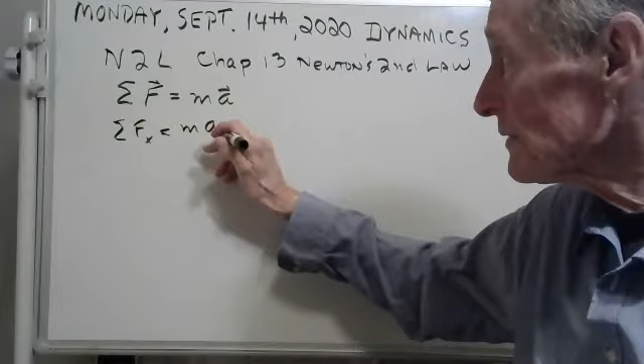Well, let's give you the theory on this. See, this is a vector equation. And so you can write it like this. See, that's the sum of the forces in the x direction. Those are x components. And this is the mass times the x component of your acceleration. Now, if you're dealing with a particle, you don't have to worry about the center of mass, but if you're dealing with a body, then this acceleration is the acceleration of the center of mass.

But see, you can break this in 2 dimensions into x and y. We could even break it into 3 dimensions, but let's learn how to work in 2 dimensions first, and then we can worry about 3 dimensions. In 3 dimensions, you really have to get into 3-dimensional vectors. But remember now, we have not only the xy coordinates, but we have normal tangential coordinates, don't we?

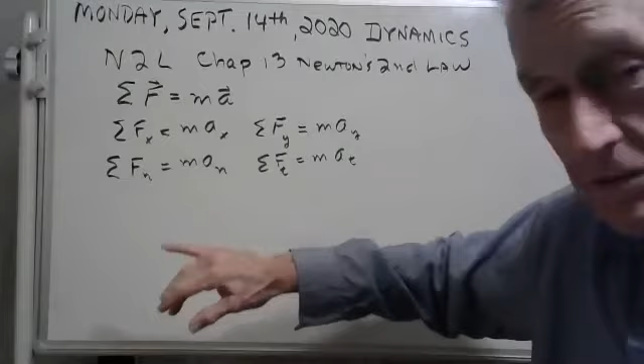See, there's your second law in tangential and normal components. Let me ask one of my wonderful students here. Let's pick on, hey, Jesus. Jesus, you're one of my students. I've had you for a couple of semesters. Jesus, what does that little n mean? There's a little n right there, Jesus. Do you see it? Unmute and tell the others what that little n stands for. Go for it.

Earth calling Jesus. Earth calling Jesus. Come in, Jesus. He must have left his room or whatever.

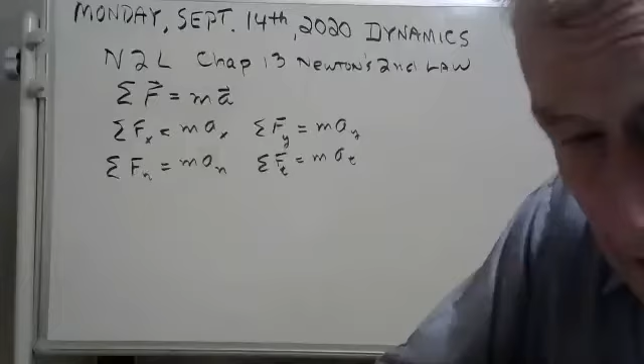Let's try my friend Shane. Shane, unmute and tell the group what that little n means there. Go ahead, Shane. Normal. Yeah, it means normal. Normal what, Shane? Acceleration. Well, yeah, it means normal acceleration. And what does this mean, Shane? This little n here by the F. Normal force. Yeah. What I wanted you to say, I think you understand, but that's the normal component of the force. See, this force, it could be a vector.

Okay, well, there's one more bit of theory here, and then we'll work some problems. And that's this one here. And let me ask Tyler, unmute and tell the other students what this says here, that F with that little r. What is the name of that, Tyler? Tyler, unmute. Tell us what that little r stands for, Tyler.

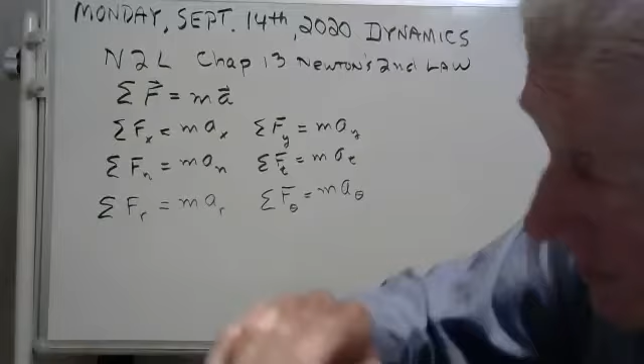Stuart, you're not going to let me down. Stuart, unmute and tell the group what that little r is there. Is it radial? It's the radial what, Stuart? Unit vector? No, it's not the unit vector. There is a radial unit vector, Stuart, and it goes like this. And we'll be using those here in a little while. But that little r stands for what, Stuart? Go ahead, I know you know this. The radial component? Yes, it's the radial component of the force. And that little r stands for the radial component of the acceleration.

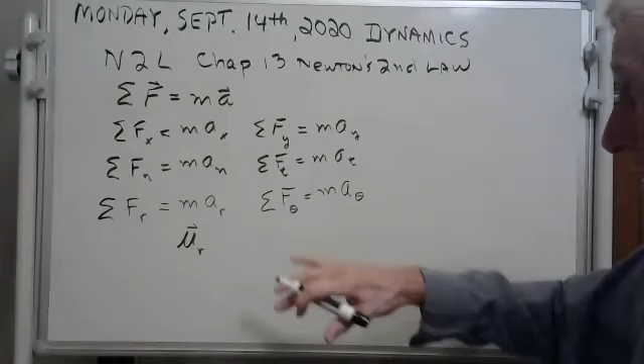Now, this is a tough one, Stuart, but you can do it. What does that little theta stand for right there, Stuart? Oops. Can you see that? The transverse component? Yes, it's the transverse component of the force. And that little guy is the transverse, kind of a fancy name. It's the transverse component of the acceleration. See, the radial transverse coordinate system is what you learned as the polar coordinates. They're just polar coordinates. Now, that right there, I've just really given you the theory in chapter 13 that's important.

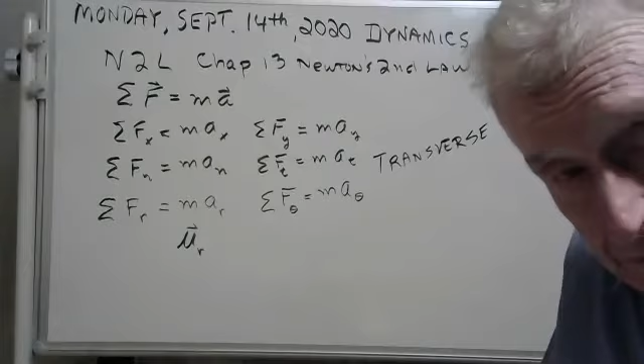That's it. You're looking at it. That's the theory in chapter 13. Now, being able to actually utilize that theory, that's what we have to do. We have to know how to use that. So that's what we're going to do in this chapter. So let's pick a problem and let's start working problems. That's enough theory, but being able to use it. What good is it if you can't use it? It's like any other tool, like a hammer or a screwdriver. There's an art to using a tool. You take a little kid, you give them a hammer, they don't know how to use a hammer. There's an art to it. Okay, well, we're going to try some problems now.

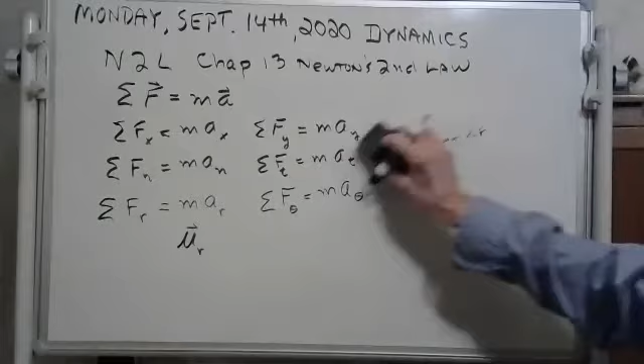Now, this first one is, let me make some room here. But there's our theory. We know what we're going to study. We're going to study Newton's second law. And the problem I want to do is F13.2. It's a fundamental problem. But now I need to find it. Hang on. Let me see if I can find it here. If you can find it, sing out and tell me where it is. I'm looking for it. Okay, I found it. All right.

A motor exerts a force. Let me write this down here. It has a force of 10t squared plus 100. That's in newtons on a cable, t's in seconds. Find the velocity of the 25 kilogram crate when t equals 4 seconds. You've got this crate here, and it's 25 kilogram. And you're connected to a motor.

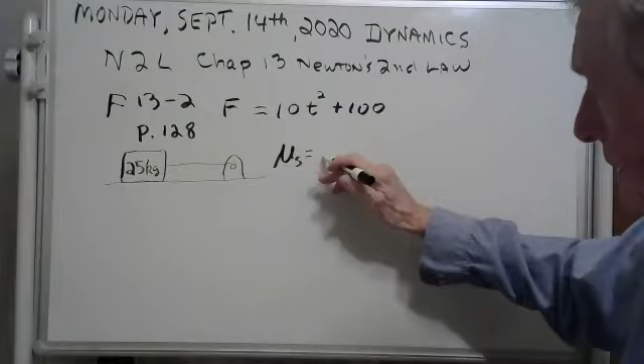Now, is there any friction is the question. Let me read the problem here. We're doing fundamental problem 13.2. It's on page 128. Page 128. Coefficients of static and kinetic friction between the crate are mu sub s. Mu sub s is 0.3. Mu sub k is 0.25.

You'll notice that mu sub s is always bigger. It's harder to break the static friction and get something moving. Once it's moving, the friction is kinetic friction, and the coefficient is smaller. It's easier. Once you get it moving, it's easier to keep it moving. It's harder to start. Once you get it started, it's not so bad. Now they want to know the velocity at 4 seconds. Okay.

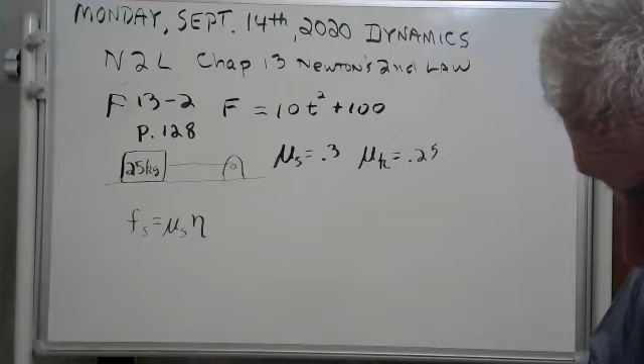Well, now you know the formulas for these things. For instance, the static friction goes like this. I like a little f for my static friction. It goes like this. It's equal to the coefficient, which is 0.3 times the normal. Well, we have to get that normal. You know, the weight is 25 times 9.81. 25, 9.81.

Okay, now the weight, take a little room here. The weight here of this is 245.25, and that's going to equal the normal. They should equal, in this case, 245.25 newtons. And so you can get the frictional force. Well, let me put that in there. Here we go.

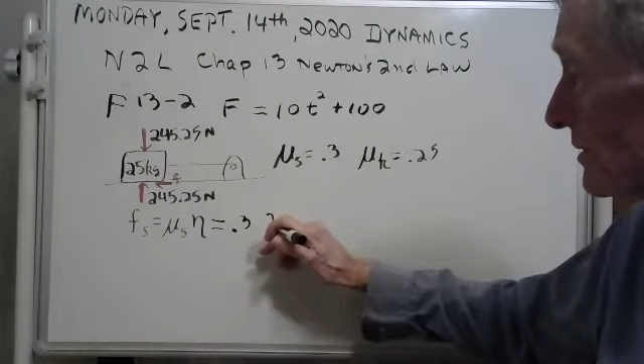The thing is, though, this frictional force, I don't know whether it's going to be static or kinetic. So let me think about that. But if you put that in there and you go 0.3 times that, 0.3 times 245.25, my calculator says 73.575 newtons.

Okay, well, see, when time is 0, when you start the clock, the force is 100 newtons. You know what? That's bigger than 73 newtons, so it's going to take off from the moment you start the clock, because you've overcome the static friction. And once you've overcome the static friction, then the friction is the kinetic friction. You've got to understand something. This really is a less than or equal to equation.

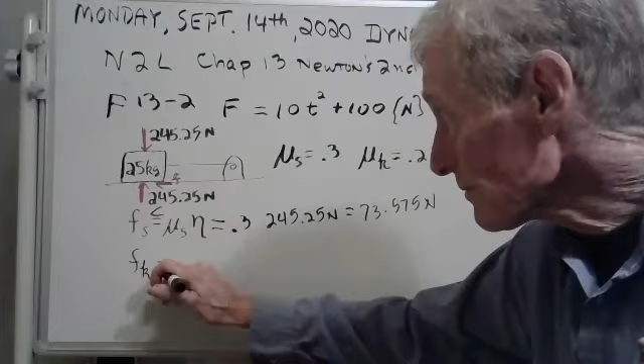When you start at time 0, the force is 100. And that's bigger than 73. So you're into kinetic friction the minute you begin. So we better do the kinetic friction. Here we go. Now the kinetic friction is 0.25 times the normal. So instead of 0.3, it's 0.25. 0.25 times 245.25. I'm getting 61.3125. We have just figured out what the friction is. It's kinetic friction, and it's 61.3125. Okay.

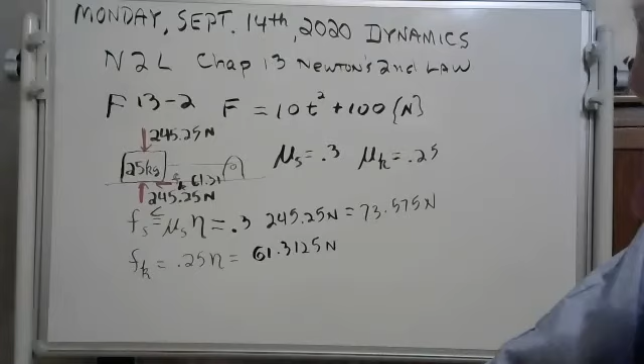So let's use Newton's second law now. And I need some room here. How about up here? I don't need this anymore. The version we want is the sum of the forces in the x direction equals the mass times the acceleration in the x direction. Okay. Well, we got the force. You can put a little x there if you want. Say x is going over here to the right. There's our x. We just need to divide by 25 kilograms. So let me write that.

We have the force. It's 10 t squared plus 100 is equal to 25 kilograms times acceleration in the x. We don't really need the x. This is a one-dimensional problem. Okay. Now that's equal to the mass, which is 25, times acceleration. So we can get an equation for the acceleration now. I'll make some room here. We don't need those. Just divide by 25 and you can get the acceleration.

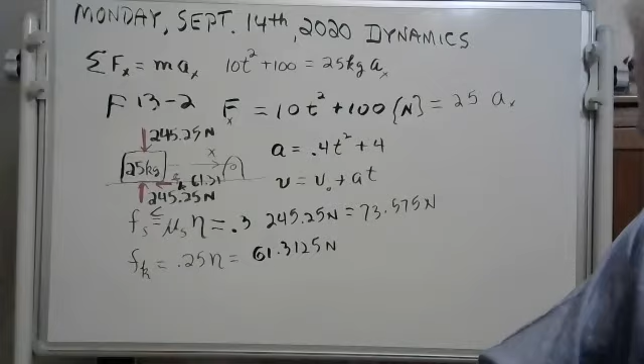Well, we have an equation that goes like this. Do you guys remember those 4 constant acceleration equations? The trouble is we can't use it. This equation only works if the acceleration's a constant. But that doesn't look constant to me. Time isn't a constant. We're all getting older. So you can't use that equation. I tell you what you could use. You could use this equation here.

That one would be okay. That equation's always good. See that equation there? It's always good. You can put a little happy face over it if you want to. There you go. Well, let's use it. Need some room to use it. There's room here. This will work. A dt equals dv. So here's your A.

dt equals dv. Now can you get to here by plugging in that A, multiplying by the dt? I skipped a step because I'm running out of room here. Maybe I shouldn't skip a step. Let's do it down here.

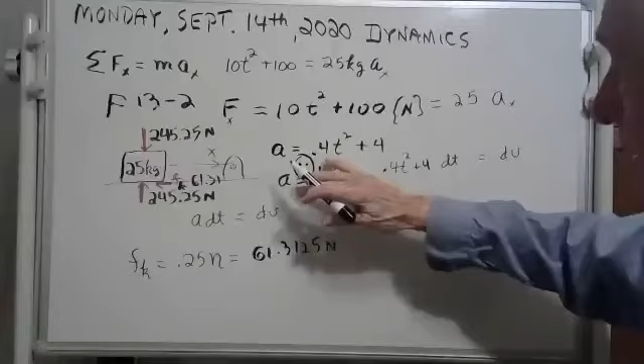See, this A equals dv/dt. You know what that is? That's a, what's the word? Definition. That's a definition. But see, you can write it like this: A dt is equal to dv. Can you get from here to here? All I did was I plugged in my A. See, we figured out A is 0.4t² plus 4. I plugged it in. 0.4t² plus 4, dt, equals dv.

Now, if you can get to here, and if you can see my writing, I think you can. Well, we can make it. Here's what we're going to do. We're going to integrate both sides. And we're going to go from 0 to 4, because that's what they wanted, and from 0 to v, because it started at rest. If you read the problem, I think it starts at rest. Yeah, it says so.

For those of you that just tuned in, we're doing fundamental problem 13.2. It happens to be on page 128, and we're almost done. All we got to do is integrate this. So if you integrate that, you'll get 0.4t³ over 3, right? Plus 4t. Now you have to plug in these numbers from 0 to 4, but we can do that.

And then you'll get v. Now I'm going to plug in the 4 and see what I get. Here we go. 0.4 times 4 cubed. That's 64, isn't it? I think it is. 64 divided by 3, plus 4 times 4 is 16. I know that for sure. Subtract 0 when you plug in the zeros. And I'm getting 24.53, a bunch of threes, equals

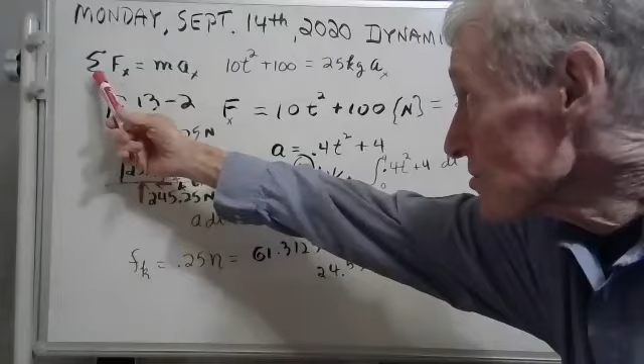Newton's second law says you take the sum of the forces, not just one of them. And I only took one of them. See, that's only the motor acting on it. I left out the friction. So shame on me. So get rid of all this stuff here. I goofed up. Sometimes I think you guys learn more when I make a mistake than when I just go through and do everything right.

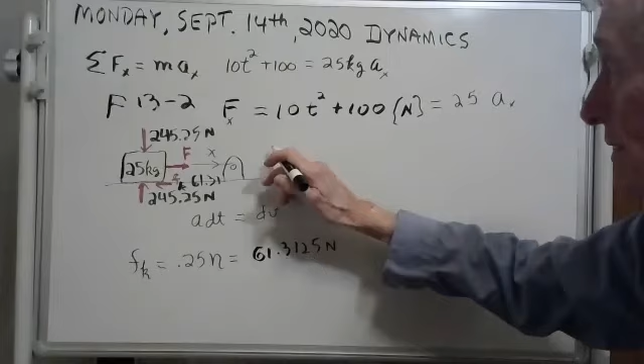What I did was I left out an important part of Newton's second law. It's the sum of the forces. That's what that sigma means. So here's what I've got to do. Now this part's still correct. I do still have 10t² plus 100. But that's not the only force. I have to subtract that friction. And we know what it is. It's 61 point blah, blah, blah. And then on the right side, we have the mass times the acceleration.

Y'all, little Southern talk, y'all see where I made my mistake? You have to use all the forces in Newton's second law, not just some of them. Now let's do this correctly. Now divide through by 25, and what you'll get is 0.4t² plus, when you divide 25 into 100, plus 4, minus, now wait a minute, I've got to take 61.

If you have a question here, if you got lost along the way, just unmute and ask, okay? I'm getting 2.4525 equals the acceleration. I bet that's right. And I tell you what, let's combine those two, shall we? Let's combine those two and we'll finish off this problem now.

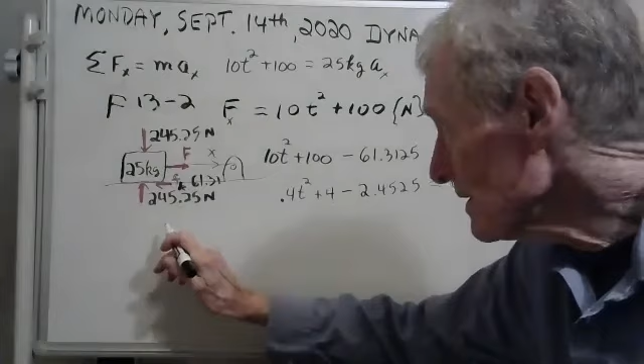And if you take that and subtract it from 4, here's what we have. The acceleration is equal to 0.4 t squared plus 1.5475. Okay.

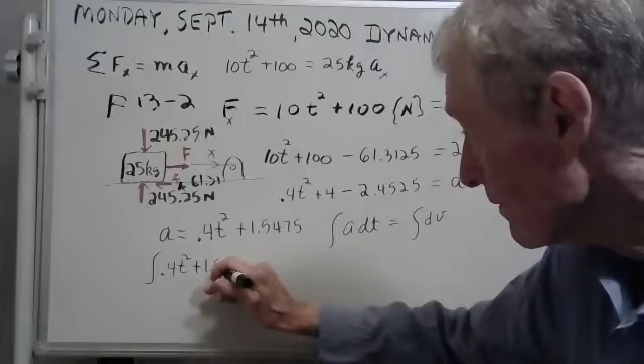Now, remember I had that integral of a dt equals the integral of dv. Well, let's plug it in and solve it. Here we go. Is there room here? I think so. You have 0.4 t squared plus 1.5475 dt from 0 to 4 equals, and when you integrate this from 0 to v, you'll just get v. And so now we'll integrate that.

And what we'll have is v is 0.4 t cubed over 3 plus 1.5475 t, right? Yeah. But then, see, you have to plug in from 0 to 4. Now we're going to get the answer, I bet. Let's try that. Okay, 0.4 times, well, it'd be 64 divided by 3 plus 1.5475 times 4. Well, I got an answer. I got an answer of 14.72 blah, blah, blah meters a second.

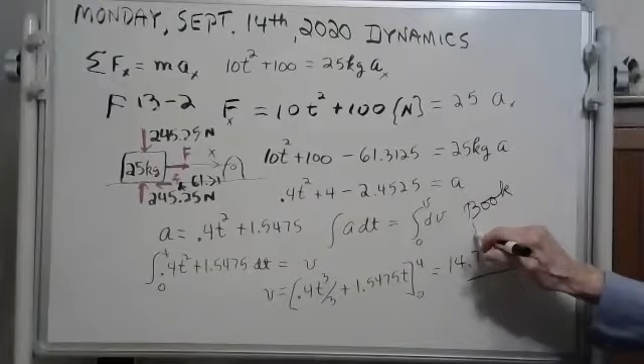Now, I forget what they said the answer was, but let me go back and look again. And what was this, F13.2? I think that's the answer. F13.2, 14.7 is the answer. Yay. The book says 14.7. They just rounded off. It's 14.72 something. Do you have any questions on that fundamental problem 13.2?

Okay, well, let me ask you a question then. Let me pick one of my wonderful students here. Let's see. Let me pick on my friend William. William, I never pick on you. Unmute, please. And I want you to answer a question. Are you there, first of all, William? Yeah, I'm here. Yay, William. William, when I did this problem the first time, I got the wrong answer. Were you watching when I did that? Yes, I was. William, tell the crowd what I did wrong. What did I do wrong?

You didn't factor friction into your Newton's second law equation. William, you stayed awake. I'm proud of you. Good going, William. See, Newton's second law has a summation sign here. That's a fancy Greek letter sigma, and it means to add up all the forces. And I didn't do that. I only had one of the forces, the motor, but there were two forces that were making that thing move. Good going, William. Okay, is there any other comment or question on this problem or whatever we've talked about?

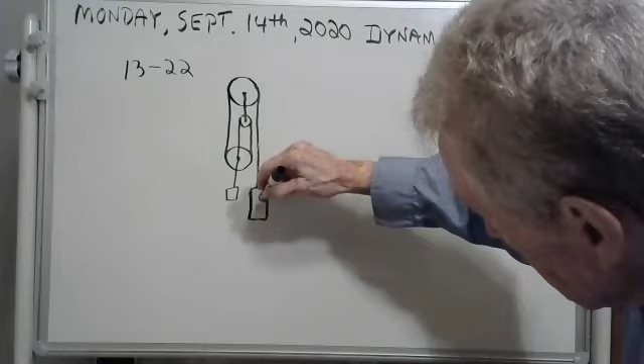I have trouble drawing these. Okay, come down here. And then I'm doing a pretty good job on this. I think I got lucky. It's coming out okay. I think I need to draw this A a little bigger. Let me draw this one here a little bigger. There's A and there's B. Yeah, that's it. That's not too bad.

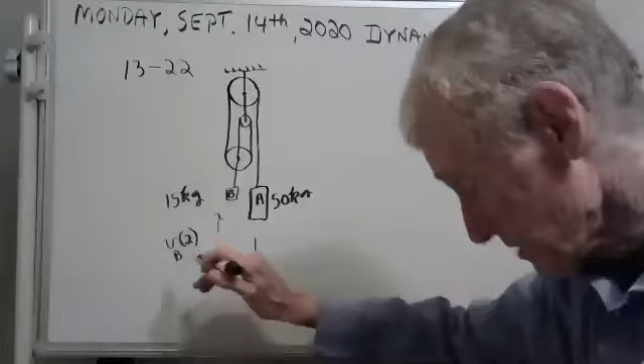50 kilogram block A. Let me make a note of that. And 15 kilogram block B. And they want to know the velocity of the 15 kilogram block B in 2 seconds. Well, I get the feeling that A is going to go down and B is going to go up. I just have a gut feeling about that. And they want to know how fast, what the velocity is of B after 2 seconds, after you release it from rest.

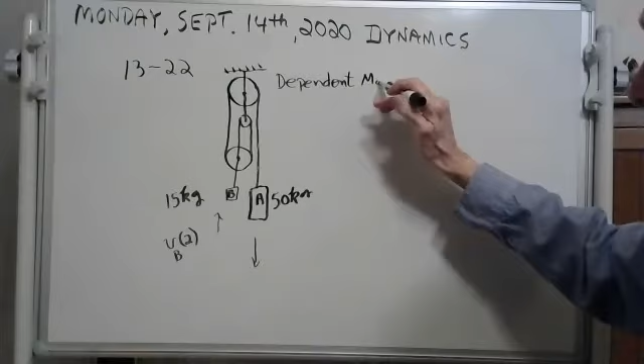Okay, that's the problem. Well, to do these problems, the first thing you have to do is write the dependent motion equation. And we studied that. Dependent motion equation. Now I'm going to shut up for about 60 seconds. And I want you to write the dependent motion equation for this pulley system. And then I'll call on one of you. Go for it. Write it.

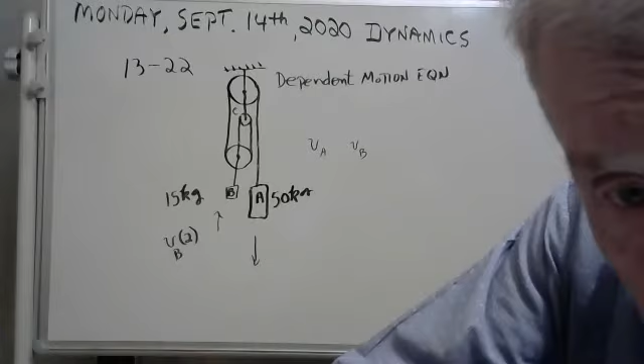Did you ever get a relationship between A and B? I mean, it's either yes or no, Alex. Did you get a relationship? No. You didn't. That's fine. That's what you're here for. Well, let me show you how to do it, Alex, and you're gonna be blessed now. I always say if you knew how to do this, you didn't learn anything. But since you didn't know how to do it, you're going to learn something, and that's good. That's a blessing for you.

Now, the book shows you how to do it the way you were doing it. I think you were doing it the hard way, but there's an easy way. See, there's tension in this cable here. And as that cable goes around this frictionless, massless pulley, you have the same tension in that cable there, and around the next pulley, and the next. And if you'll look, you'll see three tensions that are pulling up on B.

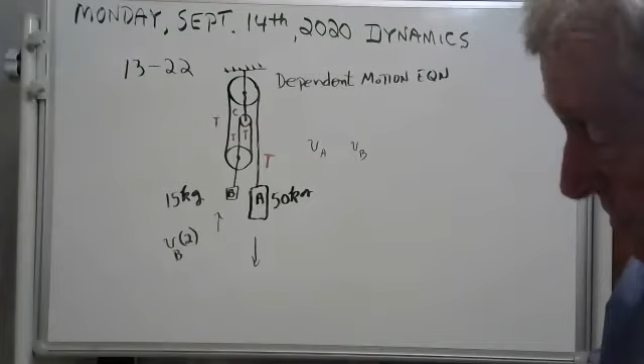So you could even write this, that the tension in this strap, that could be a metal strap. It doesn't have to be a movable line or rope or cord. It'll be 3T. You got three tensions on B. So this is going to be 1 VA plus 3 VB equals 0. That is your dependent motion equation. See, you only have one tension on A, but you have three tensions on B.

That's it. Now, we're more interested in the acceleration, so we take the derivative of that. Well, the derivative of that is the acceleration of A plus 3 times the acceleration of B equals 0. That's it. That's called the dependent motion equation. It relates A and B. But now you can do it the hard way, and it'll take me about 15 minutes to add up all those distances, but you'll come up with the same equation.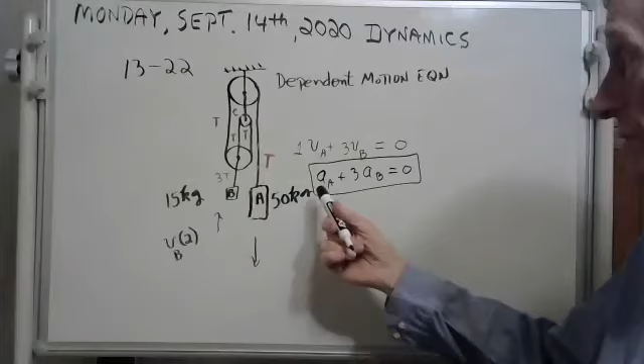There's actually a third way. If there's only one movable pulley, you just count the ropes. There's 3 ropes on B and only 1 rope on A, so it's 1 aA plus 3 aB. Okay, well, we're not done yet. They want to know what the velocity is of B after 2 seconds. Well, that's where Newton's law comes in. In this case, we're going to write the sum of the forces in the y direction equals ma in the y direction. Now, we'll just say y direction is positive going down. That's okay. That's fine.

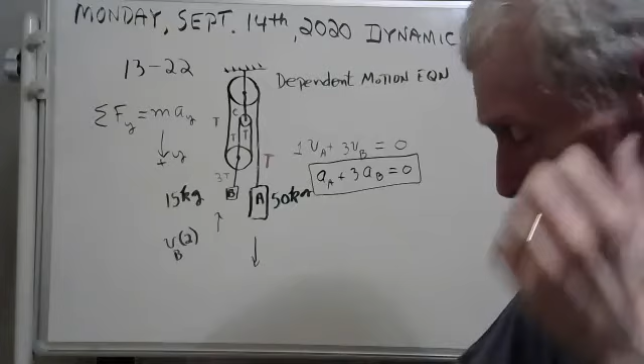Okay, and so what we have to do is we have to write the equations, Newton's second law equations. See, that's what this is. This is Newton's second law. And we don't want to forget, like I did last time, and just put one of the forces. We want to, in this case, have all the forces on our bodies. So it might help if I draw the bodies separately. See, do I have room over here? I have room. Here's B.

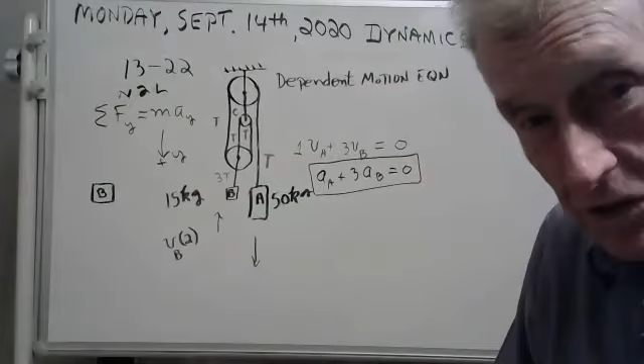And you know what you got? You got 3 T's going up on B. All right? There's your 3 T's going up on B. Can you read my writing? I need to write better. Now you also have this weight here. And the weight is 15 times 9.81. Let me find out what that is. 15 times 9.81, I'm getting 147.5 newtons. So see, we could write the equation.

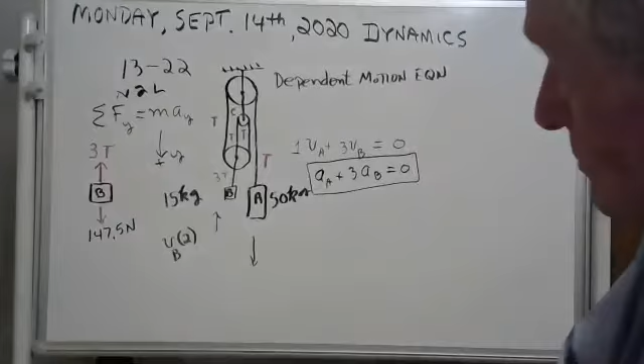Now we think B is going up. So we got 3T minus 147.5 newtons equals the mass, 15 kilograms, times the acceleration of B. I just wrote Newton's second law. That was Newton's second law for B. Now I'm going to do A. Okay. Well, on A, I just have one tension going up, but I've got 50 times 9.81 newtons going down. Let me see what that is. 50 times 9.81.

I'm getting 490.5 newtons going down. Okay. Now I'm going to write that equation. Now here's where I'm getting mixed up. I said going down was positive, so I think I wrote these backwards. Let me write them the way I had them.

This should be 147.5. Going down, I said was positive, so let me do it that way. And the 3T going up is negative. So there's my Newton's second law. And I'm writing everything going down as being positive.

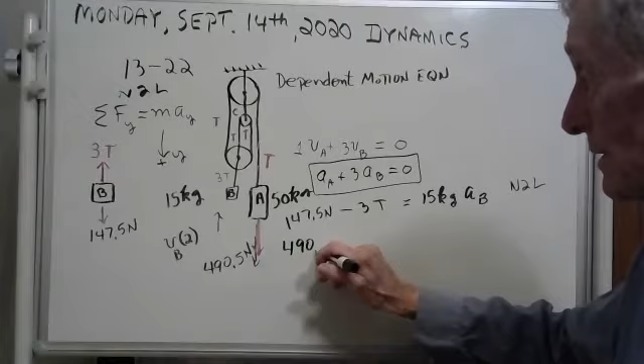Now I'm going to do the same thing with this body A. Only it's got 490.5 newtons going down and only one tension going up. And here's its mass. And there's its acceleration. I've just written the Newton's second law equation for body A. Let me box these all up for you. This is the Newton's second law equation for body B. This is the Newton's second law equation for body A.

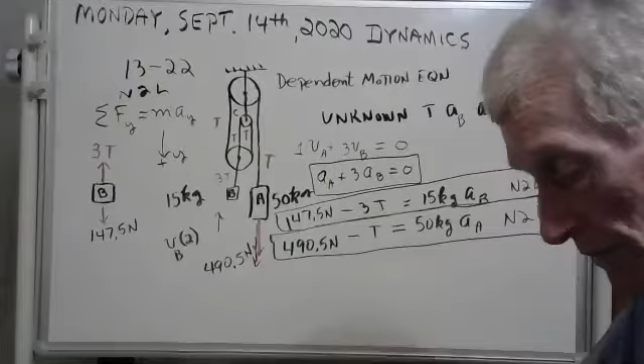You know what? We have 3 unknowns. Let me write them for you. The unknowns are tension. We don't know the tension. Acceleration of B, we don't know that. Acceleration of A, we don't know that. We have 3 unknowns. However, we have 3 equations. 3 equations and 3 unknowns, so it's doable. It's just a matter of algebra, I guess.

Tell you what, let's do it. You might have your own preferred way of doing that algebra. Some of you like to do the 3x3 matrix that you learn in algebra, or you can do substitution. I'm going to do a combination of substitution and elimination, I think they might call it. See, the acceleration of A could be written as negative 3aB. Can you get from here to here, algebra students? I know you can do it.

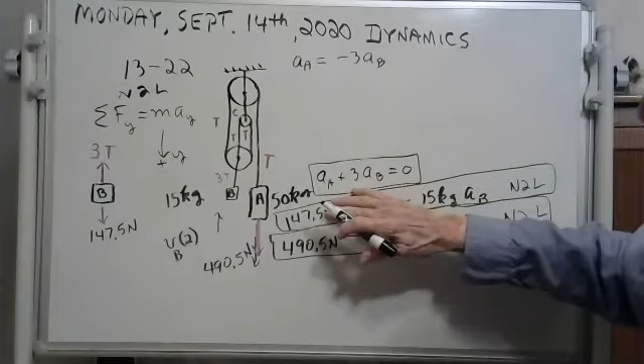Okay, and then what I'm going to do is rewrite these equations. I'm just going to rewrite this one, 147. I'm doing algebra now. This is not dynamics. This is algebra. All I did was I rewrote this equation. But now in this equation, I'm going to substitute that. So here goes. I'm substituting now.

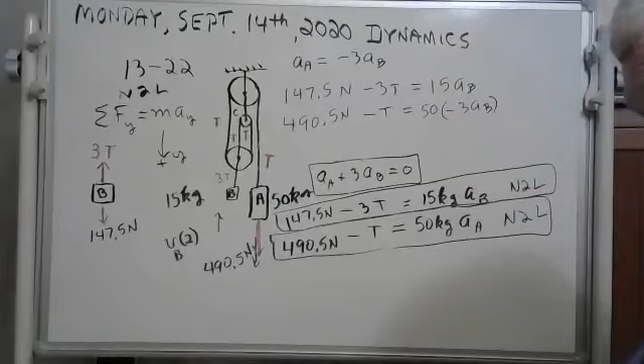490.5 minus T equals 50 times minus 3aB. See, what I did was I substituted acceleration of A is negative 3aB. I just substituted it in there. I wrote this equation underneath here. But now I have two equations and two unknowns. Anybody got lost on that? Speak up.

Well, if you're not lost, then the next thing I'm going to do is divide this first equation all by 3. Now, if you do that, here we go. There's more than one way to do this. It's just a matter of solving some algebra here. 147.5 divided by 3 is 49.166. And when you divide by 3, you'll just get T. And when you divide this by 3, I think you'll just get minus 50.

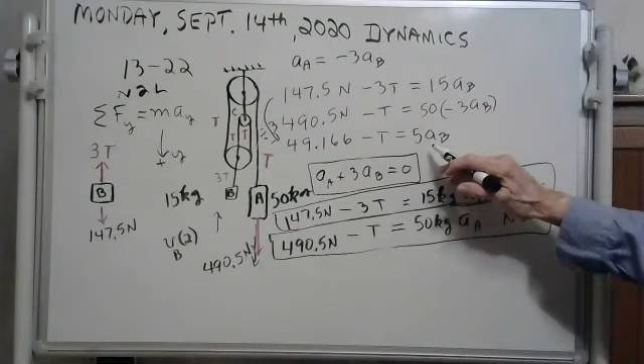No, you'll get 5. There we go. What I did was I took this equation and I divided by 3. That's legal. I divided that by 3, I divided that by 3, and I divided that by 3. Now, wait a minute, now I'm getting mixed up. No, I'm not. I'm not mixed up. I don't think I need this equation anymore. Just forget it. Now you see these two equations?

I'm almost done. I'm going to subtract. If they're equal, I can subtract equals from equals. And here's what I'll get. Is there room? Not much. I think I can squeeze it in right in here, though. I'm going to subtract 49 from the 490. So here goes 490.5. I'm going to subtract 49.166. And here's what I'm getting so far.

I'm getting 441 point, probably a bunch of 3s. But the beauty is when you subtract those T's, you get nothing. Now here, you know what that is? That's minus 150. And when you subtract 5 from minus 150, I think you get minus 155 aB. So now I can solve for aB. Here goes. aB is equal to, divide that by 155.

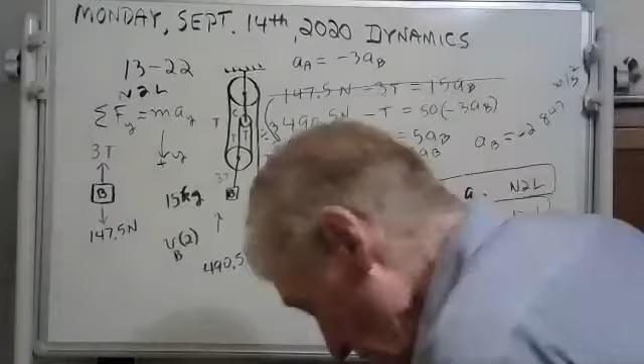I goofed up on the last problem. Let's see if I did this one right. This is 1322, and I'm looking for the answer now. 1322, they said 5.70 meters a second. Well, they rounded off. The book, does that show up? Yeah, it shows up. The book got 5.70. We got 5.695. They did okay. We did okay. We use Newton's second law. Do you have any questions on problem 1322?

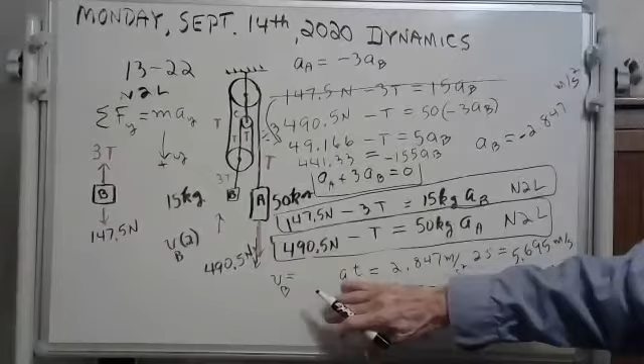I have a question. In your velocity equation, why is your acceleration positive? Good question. Identify yourself, please. Ashley. Ashley wants to know why I had a positive there. Of course, Ashley, you know this is 0. It doesn't have any initial. So whatever the velocity is, it's the acceleration times the time. Now we're doing B, and we know B is going up because A is going down.

And we should have, Ashley, we should have a negative, if going up is negative according to our stuff there. You know what the book did? They just gave you an absolute value of how fast it's going. But we said going down is plus. We could have said going up is plus. It would have been fine. But thanks for asking. Anybody else? We're talking about 1322.

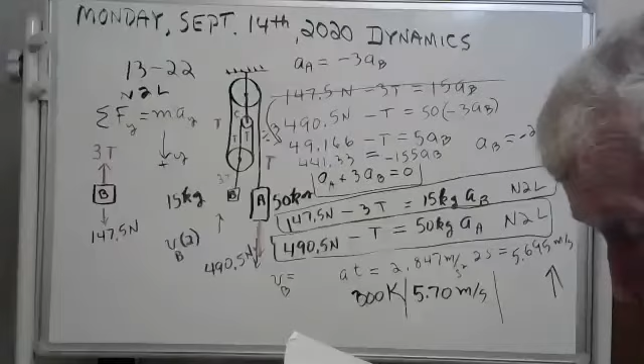Okay, well, let's do another one then. That was fun. Are you sure? Are you all sure? Anybody else have a comment or question? Well, okay. Here's your chance. I'm going to erase this. We're going to say goodbye to 1322, and I'll get on my phone to my IT person. I might do that here in just a minute. I'll get you started on something, and I'll go get my phone. I think I left it downstairs. Okay, well, goodbye, 1322.

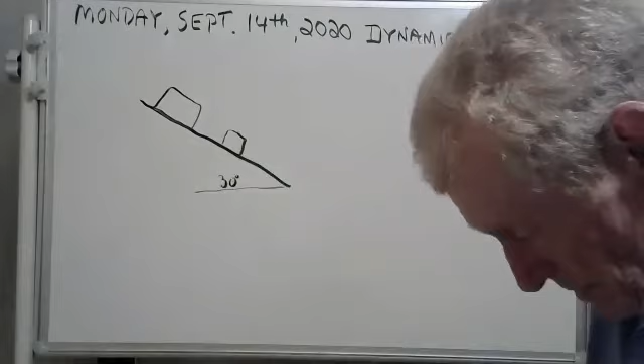We are studying Newton's second law. And this one here is problem 13.5. Let me find it here. Yeah, here we go. Now we have a hill here, a 30-degree hill. It's sort of like that. There you go. It's a 30-degree hill, and we have two crates, looks like. We have a big, heavy crate and a smaller one. Let me write this down. This is 13.5. It's on page 129.

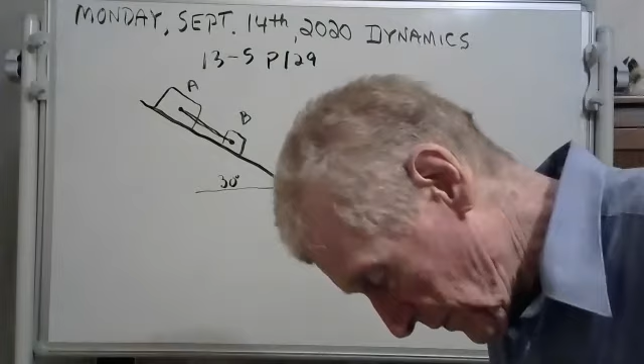This one's A, this one's B. But they're connected by a metal connection there. They just call it a link, some kind of metal link that connects them. But now there's friction. These are the coefficients of kinetic friction, because it's sliding down the hill. The coefficient of kinetic friction for A is 0.1, and the coefficient of kinetic friction for B is 0.3.

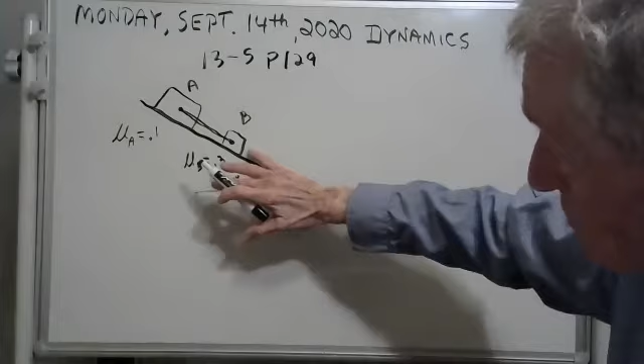You know what that means? It means B has a rougher surface on it, and A is more slick. A has a smoother surface. And I think what's happening is B is acting as a brake on A. A would go down the hill a lot faster if it weren't for B. So you see this metal link here? It's pushing up on A and trying to slow A down. But it's doing the opposite on B. B would go slowly down the hill, but A is pushing on it, this heavy body A.

And so that link is in compression. It's got compression in that link. It's pushing. See, the way it works is compression pushes and tension pulls. Let me write that. Compression pushes and tension pulls.

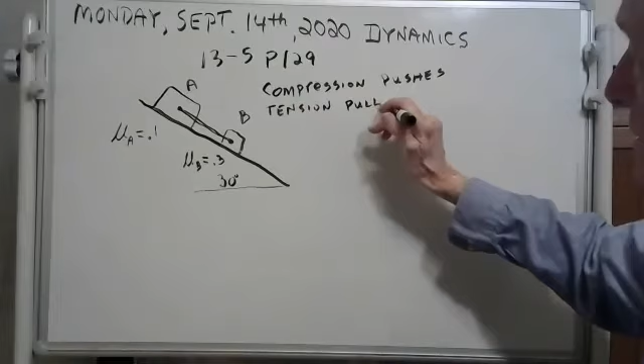Like, for instance, if you want to take your dog for a walk, or in my case, if my dog wants to take me for a walk, I'm holding on to my dog's leash and she's pulling me down the street because there's tension in the leash. Tension pulls. The dog's pulling. Of course, I'm pulling back on her leash, and she's pulling me. And the thing about a dog's leash, you can't do compression. If I try to push my dog down the street with the leash, it doesn't work too well.

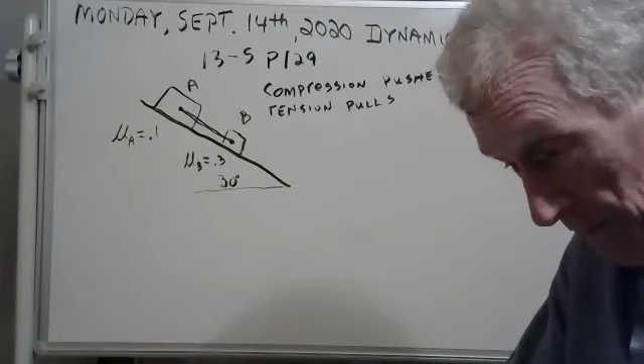See, ropes and cords and dogs' leashes don't push very good, because when you push on a leash, it just sort of collapses. They do good under tension. You can pull, but you can't push very good. So you understand that.

Well, let me read this. Blocks A and B are 10 kilograms and 6 kilograms. Let me write that. This is 10 kilograms, and this is 6 kilograms. They're released from rest, is that right? I don't know, let me read it, please. They're released, I get the feeling, from rest. Determine the force developed in the link. Okay, we'll do that. Yeah, we got all the info. Okay.

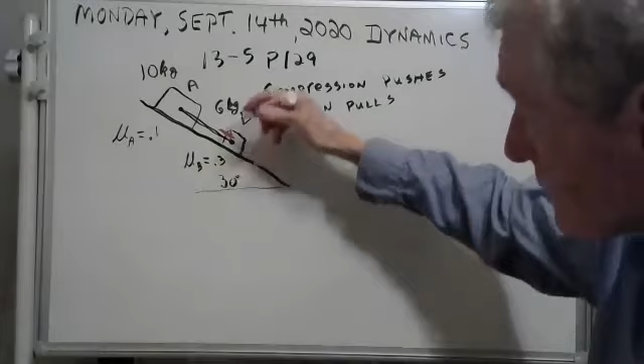Well, the way you do these problems is you put all the forces, get yourself a red pencil or pen and put all the forces on it. Now see, this has a compressive force that's pushing on it from the metal link, and it has a weight of gravity, and it also has a normal force. And I don't want to forget the frictional force. Look at there. There are 4 forces acting on that small body, B.

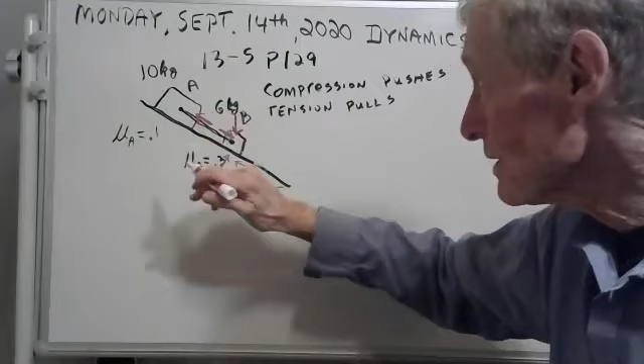Now on this one, there's a force on it pushing. Remember, it's compressive. Of course, it's going to equal this compressive force here. And it has a weight. Hey, I can do that weight in my head. 10 kilograms times 9.81. You know what that is? That's 98.1 newtons is the weight.

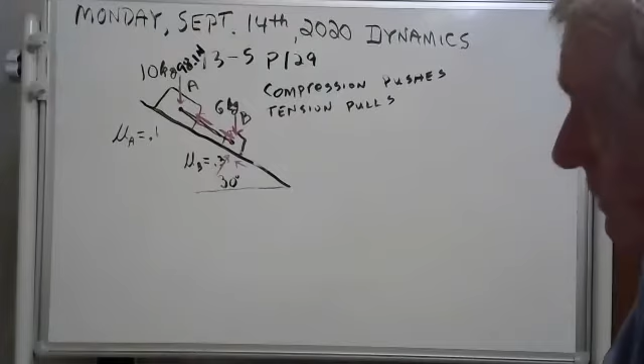Now this weight here is a little different. Let me see what 6 times 9.81 is. 6 times 9.81, I got 58.86. Okay, this one's 58.86 newtons. Oh, wait a minute, I don't want to forget the normal force.

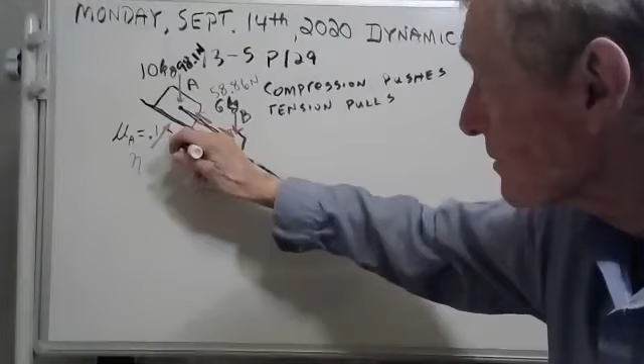Now, a normal force, they use a Greek letter, eta. Alpha, beta, gamma, delta, zeta, eta, theta. Yeah, it's eta. It's a Greek letter eta, and it's perpendicular. See, that's what normal means. Normal means perpendicular. See, this is perpendicular to the surface there. Okay.

Now we know what these weights are, and we can get these normal forces because in the y direction, call this direction here the y direction, the sum of the forces in the y direction is 0 because it doesn't accelerate in the y direction. We're going to call this the x direction. It accelerates in the x direction, but not in the y direction.

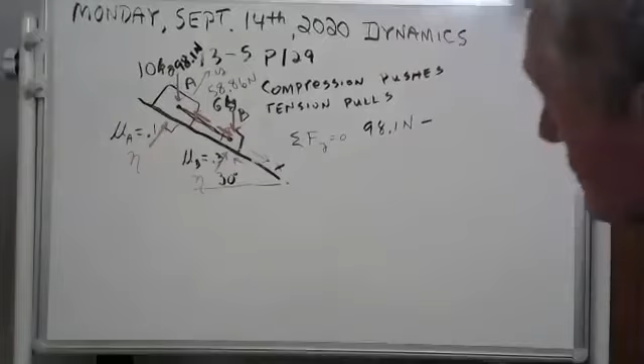And so in the y direction, on this body, you can write 98.1 newtons going down. In the y direction, that'd be a minus, wouldn't it? Well, no, wait a minute, it's cosine of 30. You want the component in the y direction, so you'd have to take cosine of 30. It's negative going in the negative y, plus the eta, and you get 0. Okay, so we can get that normal force.

It will be 98.1 times cosine of 30. Did you get this normal force as 84.957 newtons? Hey, you can get this normal force here too. It's the same deal.

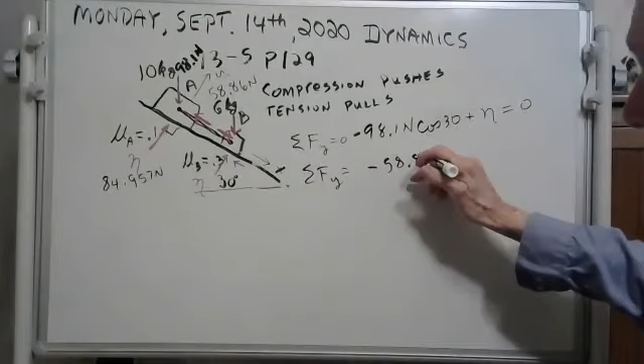The sum of the forces in the y direction will be 0 on body B. And it'll be minus 58.86 cosine of 30 plus the eta on B. See, that's the eta on A. And so that's 0. And so that is 58.86 times cosine of 30.

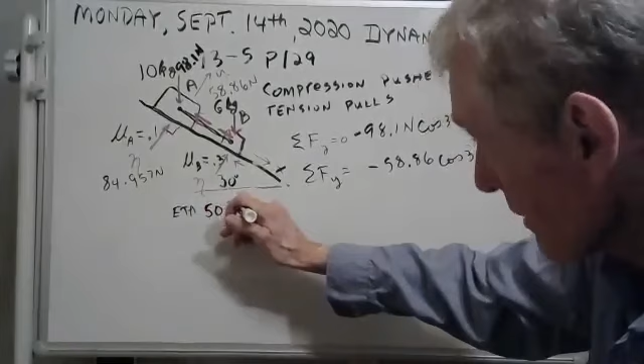Well, I'm getting an eta, it's a Greek letter eta, E-T-A, a value of 50.974 newtons on the normal force on B. Now we can get the frictional forces. Whoops, I forgot to draw my frictional force. Shame on me. There's 4 forces on each body.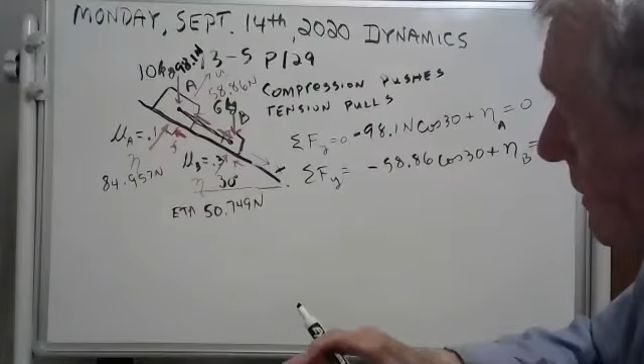See, that has a frictional force. And the way to get it is you take, in this case, 0.1 times the normal. Well, that makes that friction 8.495 newtons. And this friction here, that's 0.3 times the normal, which gives you 15.225 newtons. Okay, so now we have all our forces and we can write our Newton's second law.

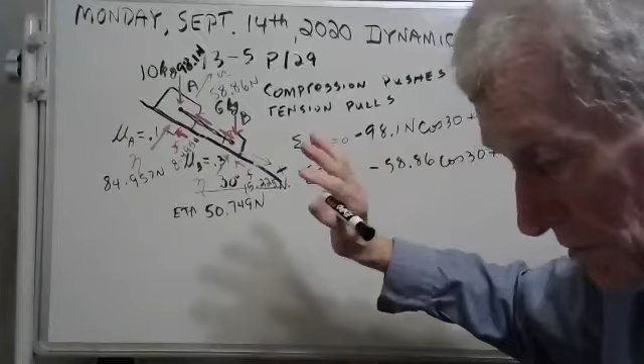This is how you do problems. You draw your bodies with all the forces in red. You try to find the forces, and then you write your Newton's second law. Now what I want you to do, I'm going to shut up for a minute. I want you to write the Newton's second law for body A and for body B. And after you do that, I will write it and we'll compare and we'll see if you got it right.

Okay, I'll be quiet. I want to see if you can write the Newton's second law for body A. Now there's 4 forces. Go ahead.

While you're doing that, I'm going to go get my cell phone so I can call my IT person.

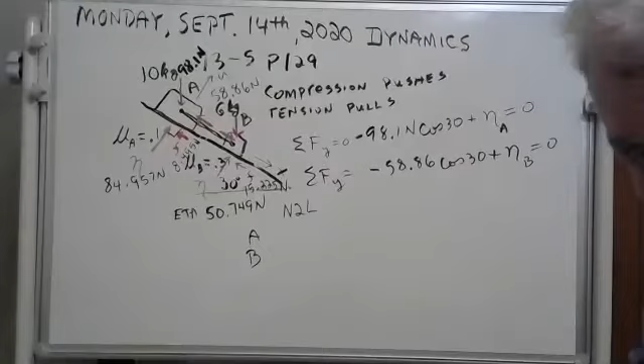Okay, meanwhile, I'm going to go ahead with my class here. I'll just put you on speakerphone. Okay, well, yeah, maybe I shouldn't put you on speakerphone. Too much noise there. I'll take you off of speakerphone. But I've got you right here.

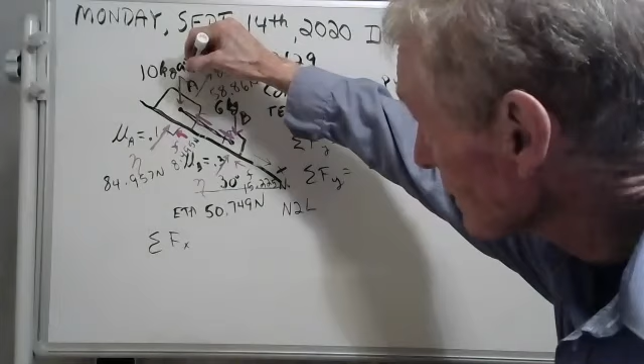Okay, let me put the answers up here and let's compare. We have 5 minutes left and we can solve this problem. Okay, on A, we're really just interested in the sum of the forces going down in the x direction. So we don't care about the normal. But see, the x direction is going down this way. So what you've got here is a component. See this 98.1? It's got a component in the x direction, and what it is is 98.1 newtons sine of 30 going down the hill.

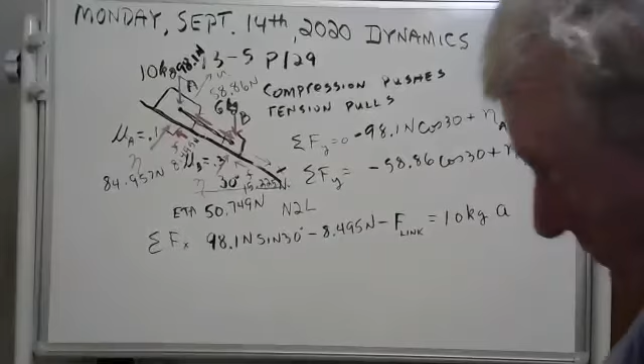And then you have the friction, which we know is 8.495 newtons. But see, it's going in the opposite x direction. And then you also have this link force. I don't know what to call it. Let's just call it the force of the link. How's that? It's not equal to 0. It's equal to the mass of that, what is it, 10 kilograms, times the acceleration in the x. That's it. Is that what you had for body A?

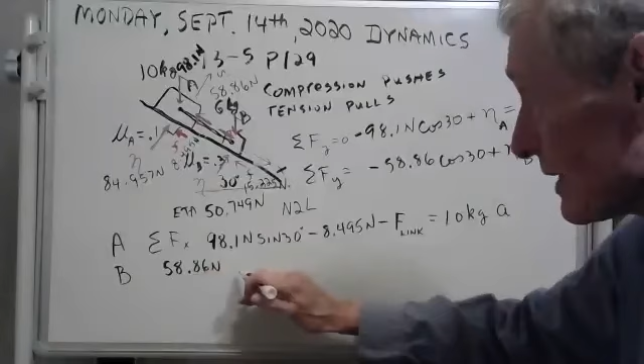Now I'm going to do body B. Do I have enough room? Yeah, I have enough room. Here we go. We're going to take all the forces in the x direction. And what that will be is 58.86 newtons. But see, we just want this component that's going down the hill. We're doing the x direction. So it's sine of 30 minus the friction. Well, see, the friction's going up the hill. It's 15.22.

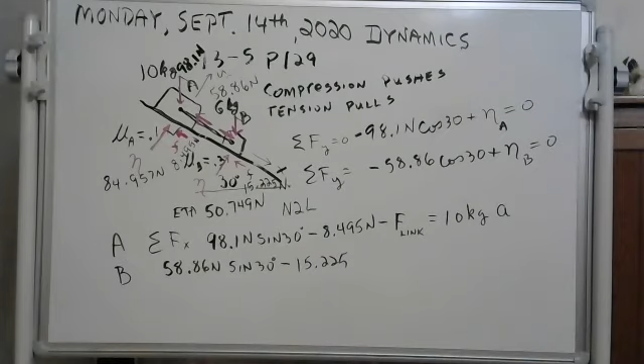Yeah, I'm listening. And available until 9/12. Did you want me to extend it? Well, it says it was available till 9/12. What is today, the 14th? Yeah, let's extend it. Give them a couple of days. Okay, so 9, what, tomorrow maybe? 9/15? Well, they haven't even started on it yet. But you could give them till tomorrow at midnight. How's that? Yeah. That ought to work. What will that be? The 15th? Yeah, and then hang on just a second. Is there somebody that can check and see if it posted? I'll tell you what, give them to the 16th. I'm worried about them. I want them to do well on this.

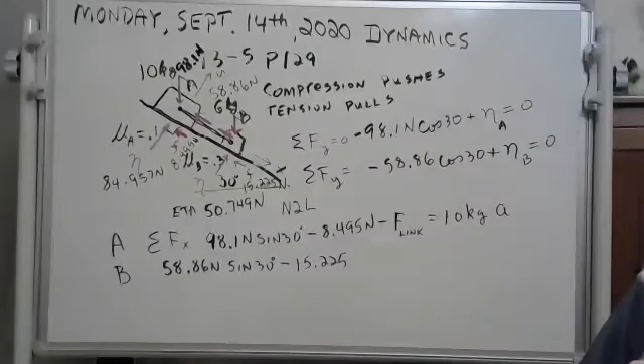Yeah, okay. Earth calling anybody out there in my class. My IT person is going to change this so you should be able to get that exam 1 till midnight on the 16th. What's that, Wednesday? Yeah, can you ask them if they can see it? Hey guys, anybody out there, can you see the exam 1? Yeah, the exam just popped up. Oh, it popped. They said yes. I think it's going to work. So they've got till midnight Wednesday night, right? Yeah, the 16th. Hey, thank you so very, very much. And the class thanks you. Hey, everybody, say thank you to my IT person. Thank you. You're welcome. Okay, buddy. Talk to you later. Bye. Yeah, it's nice to have an IT person.

Okay, now let's finish this off. We only have 2 minutes left in our class. And let's see, we've got one more force to worry about. Do you see that this link force is pushing the body B? So I've got to make that plus the force of the link equal the mass times acceleration. Now I want you to stare at these two equations here. I'll box them up for you. I wish I had time to do the algebra, but I don't. My time is running out.

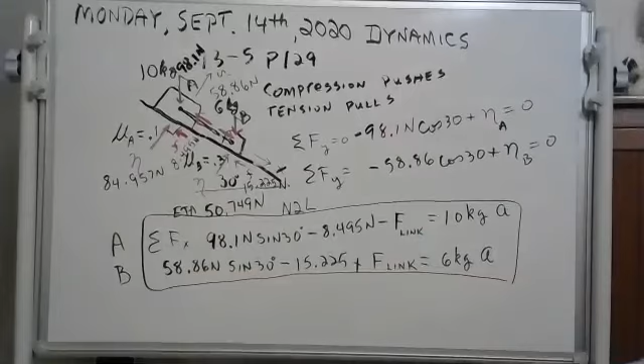But if you look here, there's two equations with two unknowns. But you see the acceleration's constant for both of them. They're connected. Whatever the acceleration of A is, B has the same acceleration. So you have two equations with two unknowns. Is there anybody out there that can do two equations with two unknowns? You all can. So if I only had time, we would solve those, but you could do that. And that's problem 13.5, and you'll get the answer in the back. Did that make sense to anybody? Probably not.